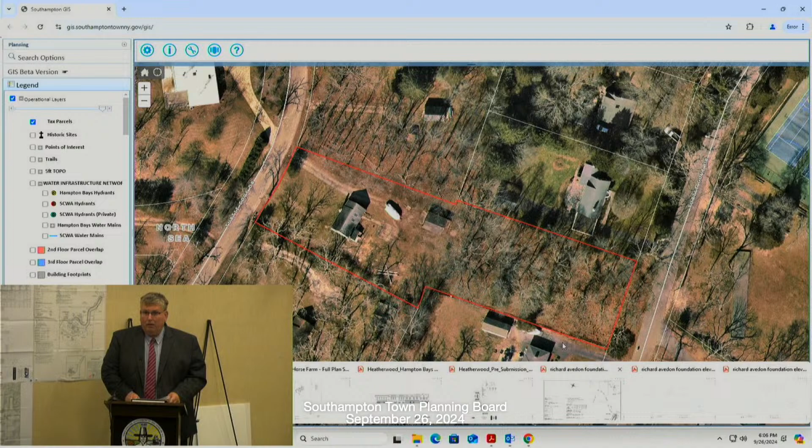Is there anyone who wishes to speak to this application from the audience? Sorry, could you say that again? Would you like to speak to the application? Turtle Cove? This is public hearing number 1. Is there anyone on Zoom? Kevin? No. Nope. No one on Zoom.

Okay, then we'll motion for a 10-day written comment period, by Dennis. Second, by Gloria. All in favor? Aye. Opposed, abstention, 6 in favor. Thank you. Excellent, everyone, have a good night.

You too, thank you. Okay, we're moving on to number 2, the Lewis Riggio Horse Farm Agricultural Construction Permit, Special Exception. Dennis, do we have notice? We do, Madam Chair. Great.

Dennis, you want to read it? Please take notice in accordance with local law 14 of 2022, a public hearing will be held by the Southampton Town Planning Board on Thursday, September 26, 2024 at 6 p.m., Town Hall, 116 Hampton Road, Southampton, via video conferencing, to consider ag construction permit special exception application entitled Lewis Riggio Horse Farm. The application is for the demolition of the existing 21,630 square foot riding arena and the construction of a new 26,212 square foot riding arena and a 10,383 square foot stable to accommodate 18 horses, connected by a 371 square foot roofed unenclosed breezeway, two 10,000 gallon rainwater storage tanks, solar panels, generator, and two underground LP tanks, as well as associated parking, drainage, and septic improvements on Ag Reserve number 1 of the Meadowview Farm subdivision, located 846 Seven Ponds Towd Road, Watermill, tax map number 972-2-13.18.

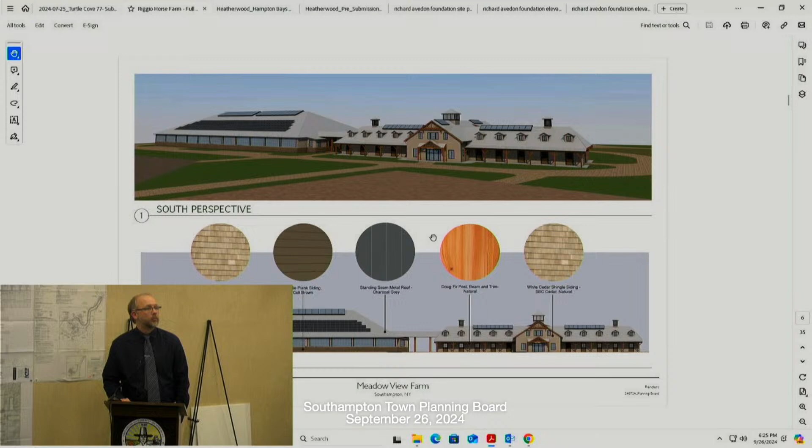The style of the project is very traditional. We have cedar shingle siding along most of the exterior facades, with some Hardie siding at the arena to break up the shingles. We have heavy timber elements in a natural stain finish and a standing seam metal roof throughout that will have a non-reflective finish on the surface, but that gives us some durability and longevity in the roof surface.

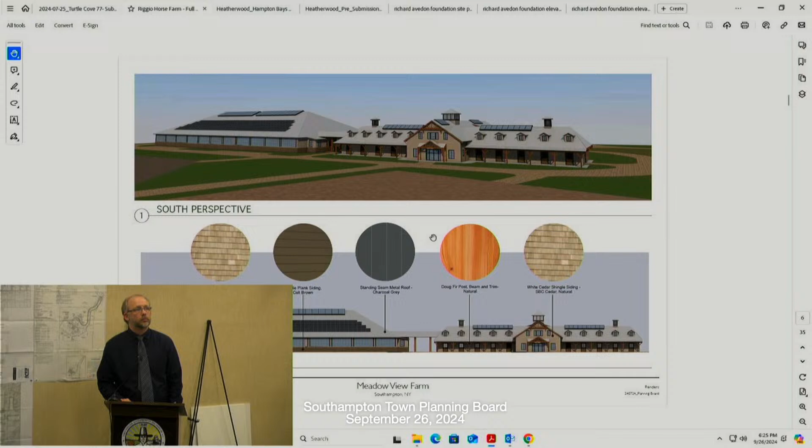Another goal of this project is to be as sustainable as possible. The darker rectangles on the roof of the arena are solar panels. We're working with the mechanical engineer to show how much energy we can produce within the power company's requirements, pairing that with geothermal heating and cooling equipment to be as energy efficient as possible. The lighter rectangles on the roof are skylights to bring in natural light and ventilation, making this bright and airy on the inside.

We are planning to have a rainwater recapture system so that we can capture the rain and feed it into an irrigation system on the property, and to use as many materials as possible that are made of recycled content or from sustainable sources. So there's a goal to be as sustainable and detailed as possible, and mindful of our material choices.

We did present an alternative cupola and dormer design to the Architecture Review Board. Those are on the following pages, and they approved that slight change for our exterior design. So this is our preferred version, where the dormers and the roofs of the cupolas changed to a more spire appearance, with more windows in front at the main entrance of the barn. That was a small change, but we reviewed it with the Architectural Review Board.

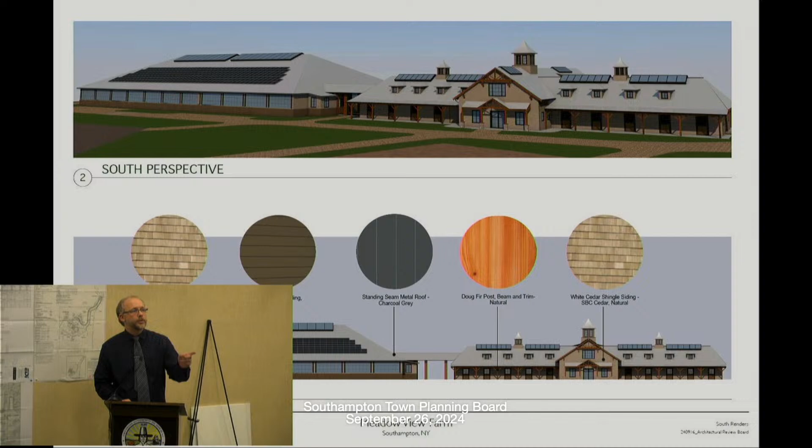This just compares the two designs. The one we had initially submitted to the planning board is on the bottom, and our preferred alternative is on the top. In the Architectural Review Board's referral back to this board, they indicated that they approve of the preferred alternative.

Those are the main overview of the architecture of the buildings themselves. I'll hand it off to John Hamilton to talk about landscape design.

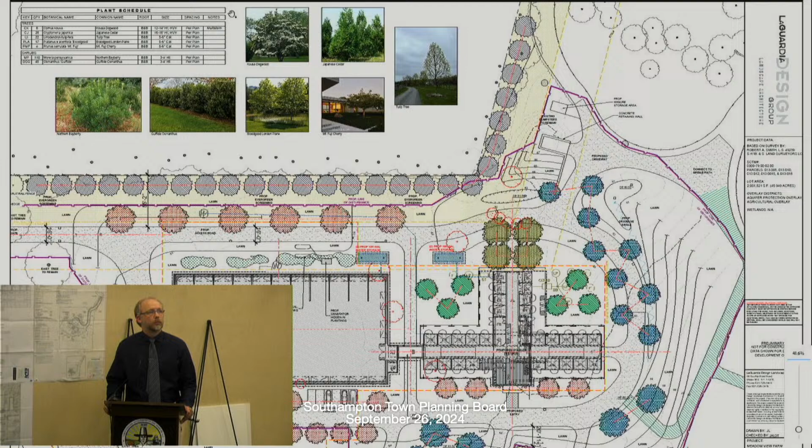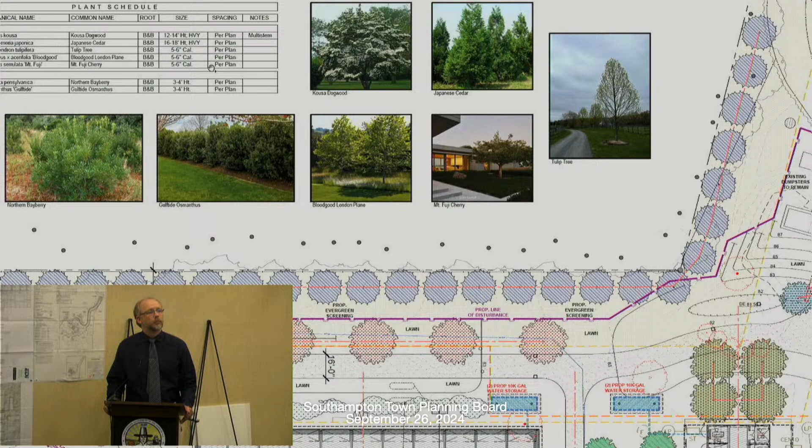So we're going to be blending these around three sides of the structures: the north, east, and south. These are going in at a 5 to 6 inch caliper, probably at least 25, maybe 30 feet tall on installation. Quite a few trees - I think the tulips and London planes come out to around 45 trees total. This is quite the investment on behalf of the clients to create an amazing impact to the screening and grounding of these buildings immediately when construction is done.

Just one point to note - on the west side of this plan, just west of the arena, we don't have anything proposed. That's due to the existing conditions between this structure and the road. There are some incredible mature oak trees already in that location, so it doesn't make sense to plant anything else there. They're probably 70 to 80 feet tall with 50-foot wide canopies, so it's already very well screened from the street. There's also an existing mature privet hedge, about 12 feet tall along the road. So there are a couple layers of effective screening between these buildings and the road. We're just putting back some more trees around the other three sides of these buildings.

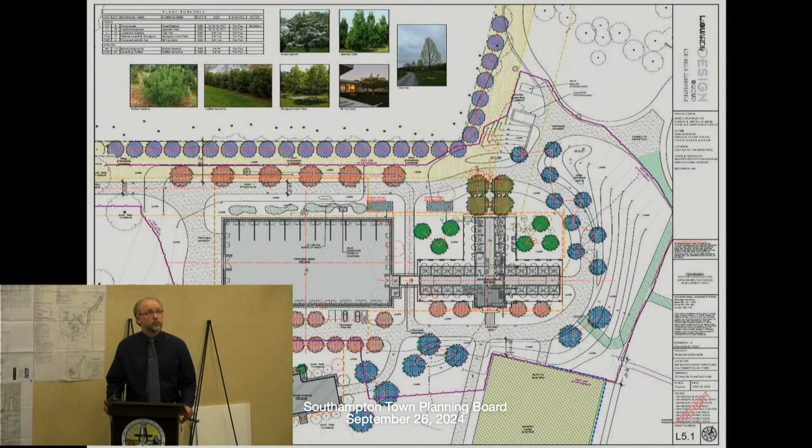And I think that's most of the planting strategy here. Maybe you could flip to the lighting plan, the landscape lighting, the next sheet please.

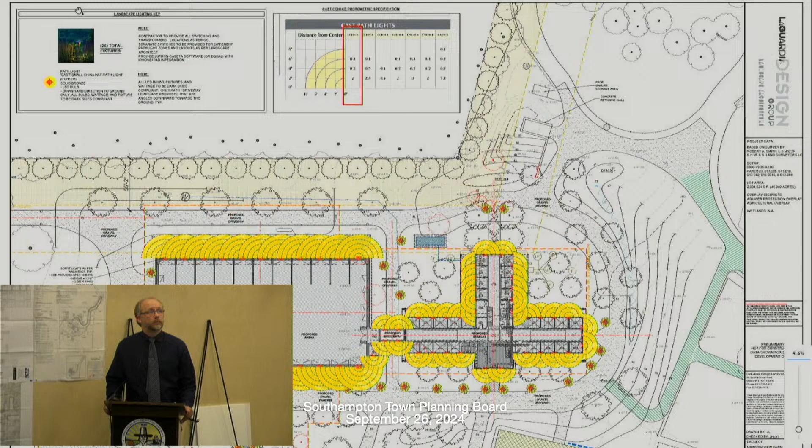Thank you. And the lighting here is very simple and functional. We're really just proposing path lights along the driveway and walkway areas for safety and functionality. They're all down lights, dark sky compliant, LED low voltage. You can see those around the parking areas and walkways. And if you needed Carol to touch on the down lights on the buildings, this plan shows those as well. Those are all pointed down along the facade, and they really don't spill light too far from the building itself. So the lighting in general is very minimal, just for safety and functionality, really nothing more than that.

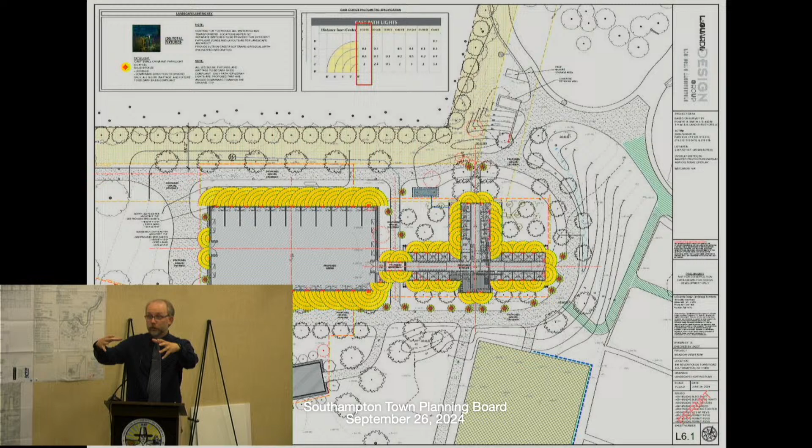Just to interrupt you, John, real quick - on this plan, you see the yellow areas, that's the only place we're likely to be. Beyond that, it's 0-foot candles to the property lines and all around. So it's really just in the immediate area of the building in order to provide access and safety around the building. Everything else is going to be dark, and also the level of light adjacent to the building is fairly low. So it's not going to be this bright, shining building even at night - it's going to be just enough to provide access and safety into and out of the building.

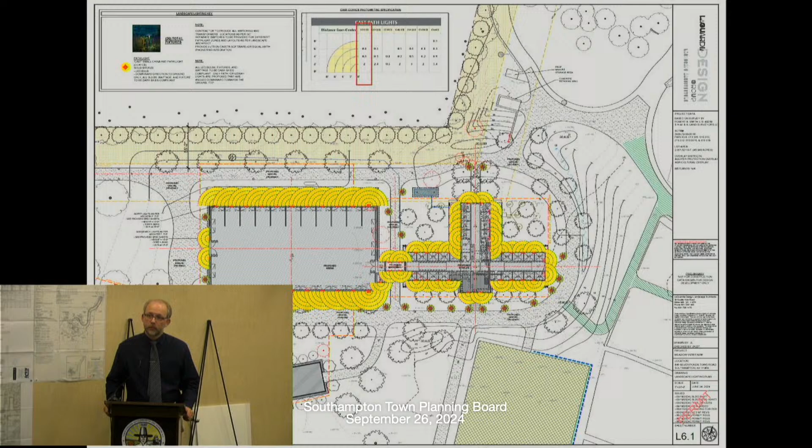Can you give us an overview quickly of the paddock areas, any of the grazing areas around the farm? They're all existing and they're going to remain. So there's a number of paddocks. I'll point it out on this plan because it's a little easier for the board to see. So there are a number of paddocks just around for the exercise of the horses and some of the rescue animals that they have on site as well. They're existing and they're going to remain. So the entire area between the neighbors around the building and where the buildings are will remain green and open, and the fencing is of a reasonable height, and that's basically it.

And Mike, you had mentioned there's going to be a lounge for the workers, employees, whatever, on the second floor. There's no living quarters on the property, in this building or any of the buildings on the site. Could you clarify the sanitary system, the two sanitary systems for the horse washdown? It's kind of unique - what was it, like a metal grating?

We're still trying to figure out exactly what it's going to be. Under the health department regulations, we have to have a separate system when you have a horse stabling facility. There has to be a completely separate one available for horse washdown areas, and that is the term used in the commercial standards of the health department.

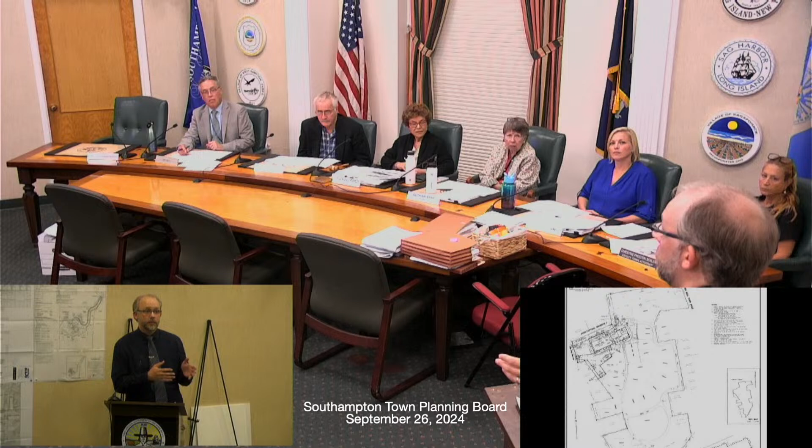I'm not sure at this moment, and maybe Carol has looked into it more, whether it's a matter of grates in each of the stables where that drains, or if there's a place where they take it to in the building and that's where it gets entered into the septic system.

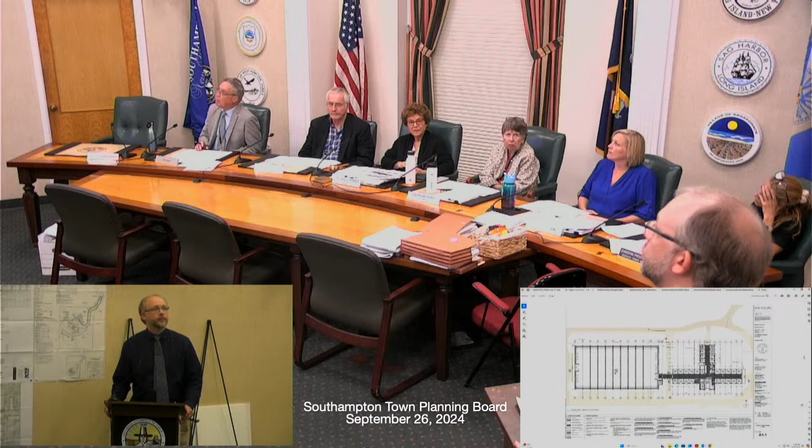Carol: Just to clarify, in the floor plan we have a number of wash stalls and a vet farrier area in the cross aisle. Within those wash stalls there are trench drains, so as you wash down the horse and water flows into the drain, you can imagine the amount of dirt, hay, and manure that might also go into that drain.

There is a clean out within there to catch a lot of the debris, but I think that is the concern with the health department - that water runoff goes into a septic system separate from the sanitary system for the building. It's those specific areas at the top left of the plan, those 3 wash stalls and a vet farrier stall, that have drains in them.

The other 2 on the other side of that aisle are groom stalls that won't have water washing down in them, but may be rinsed out or hosed down. So those have trench drains in them as well.

I'm not sure if you wanted me to point out on the floor plan what she was just talking about. Does the health department require - I would think everything could go channeled to a dry well - it appears they require the standard septic system for solids and then the overflow after the solids. Is that something you add?

Is that something they require? That's something they require, because any of the hay or grasses or other debris that would be on the horses from the washdown - you can't put it through a standard IA system because there's too much other biological matter, so it's not as efficient and it would clog up the machines and mechanisms. That's what they require. That's a requirement of all horse farms now? Yes, when you have horse stabling facilities on site, that is what's required.